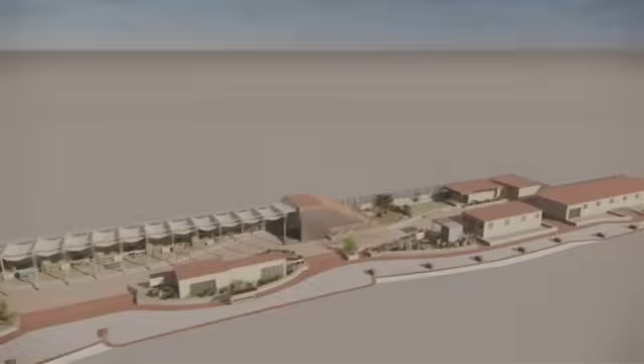My major design project was called Life in a Metro. It was about reclaiming public spaces for use by community, and the public space that was identified was a transit hub, particularly the Mandi House metro station.

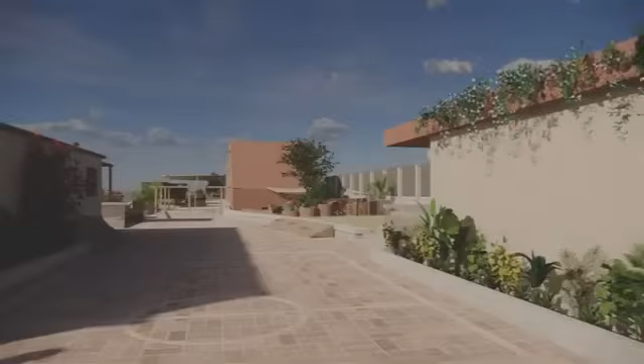I am Rashika Lungani, a final year interior architecture and design student at IIAD. In this project, I divided the station into two parts: an underground and an overground metro station.

What led me to arrive at Mandi House is an interesting story. I was transiting one day and I saw this massive span of underutilized space in the middle of a very rich locality. It was located near the National School of Drama, the Lalit Kala Akademi, and the Triveni Kala Sangam, places rich in art and culture, which was not represented in this public space. So I identified its potential and I wanted to change that.

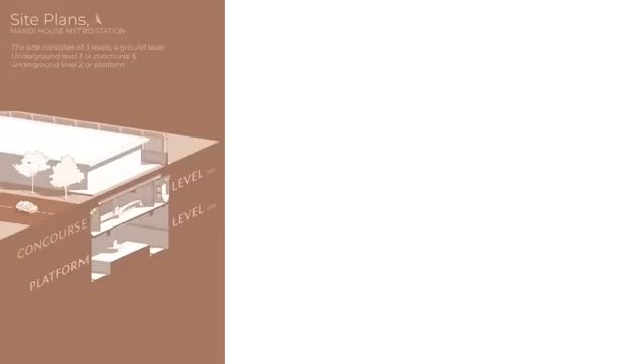Identifying the potential of Mandi House as a site, I needed to understand the site itself. Let me paint you a picture: the site is divided into three levels, a ground level where people enter, an underground level which is mainly the concourse where people move across to different lines, and finally the platform level where people catch their metros.

Given the importance of functionality over design, I knew I could not do anything on the platform level, leaving me with the other two levels. Even underground, the function of transit was more important than design intervention. That's why I arrived at a small underutilized area next to gate 3 of Mandi House metro station, where no people moved across and the space was left barren after the token booth was closed down after its discontinuation.

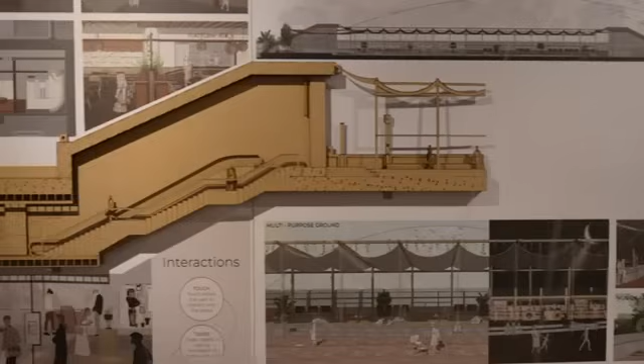The ground level itself had a lot of space and I wanted to use the entirety of it. When I was going through the site, certain problems were brought to my mind.

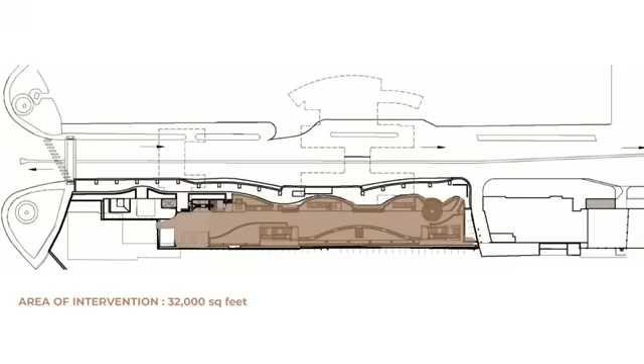On the underground level, I noticed there were no spaces for people to sit. It was just a dull transit space with no character, something I thought could be rectified by good design. On the ground level, the situation was a lot worse: 32,000 square feet of area being used for nothing, just a paved space at the side of the road, and that was it.

So with this, I decided to move forward with my project. This analysis made me understand that these two areas I was working on could not have the same design brief, because they had different problems and catered to different people.

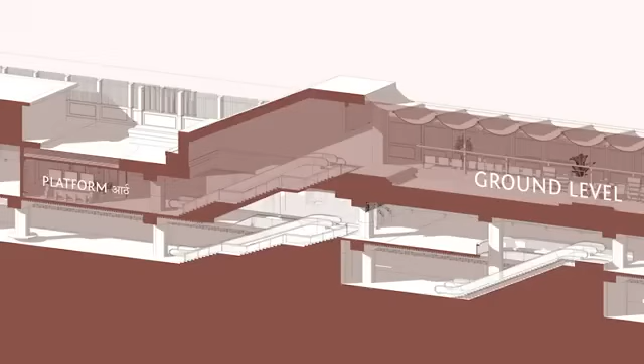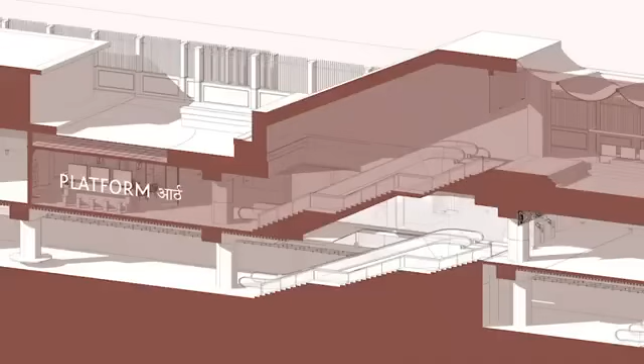At this point, my project bifurcated into two areas: the underground level, which developed into Platform Art, a cafe plus exhibition space for budding artists and metro users, and the ground level, which became Metro Maidan, an open public space focusing on physical, mental and educational opportunity for all the people around.

Identifying what I wanted to do, I needed to research more about how to achieve this outcome. I quickly realized the kind of space I was trying to create did not actually exist anywhere. As a result, my best resort was to go to metro stations and public spaces separately and see where I could find a cohesive spot for the two to coexist.

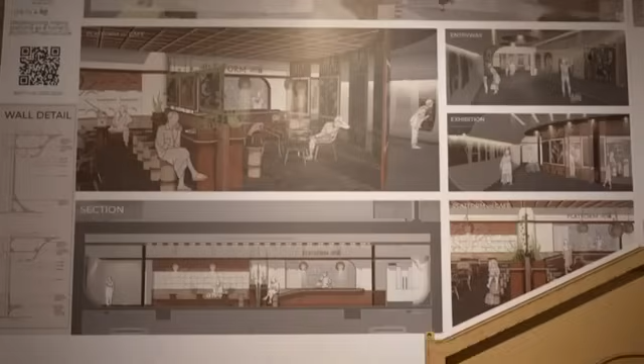Acquiring the plans for the Mandi House metro station was also a challenge on its own. Plans for public spaces are usually not shared openly with the public, so I knew it had to be a battle. I contacted every architect whose email ID was public on the DMRC website, and mailed them consistently, to the point where I got my plans with a reply saying please stop mailing our team. That was interesting, but they were really nice enough to help me out and assist me through the process. With this plan in hand, I could finally move to the concept stage of my design.

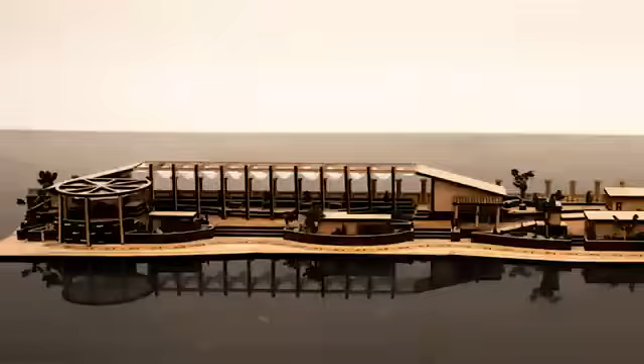The concept development of this project was a journey in itself. Now, with these two areas in my hand, I started with the underground level first.

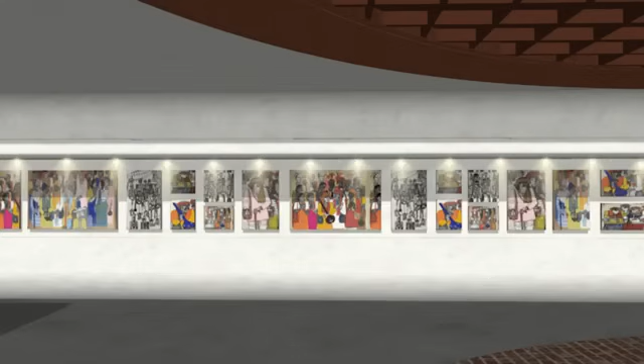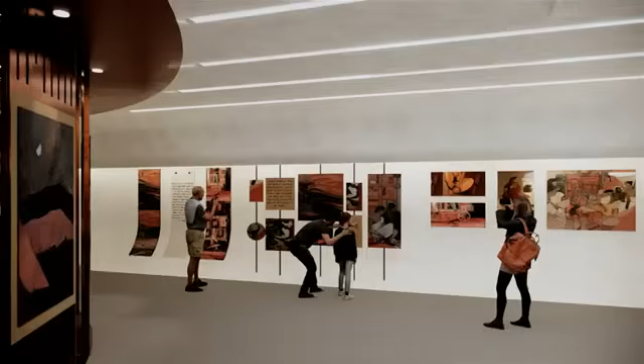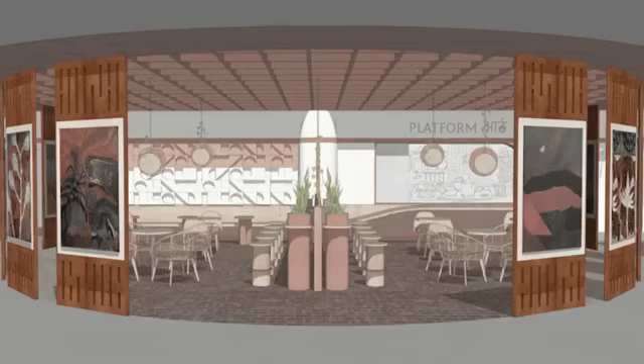I knew I wanted to create an exhibition space for artists because there is no free exhibition space in Mandi House. However, what type of exhibition it should be was a subject of debate between me and my faculty, particularly my head of department, Mr. Snehanshu Mukherjee. I wanted to create a metro museum, and he straight up told me that's the most ridiculous thing he'd ever heard. We realized the general public doesn't have incentive to go to places where art is displayed, especially when rushing home. Hence, we came up with the concept of inculcating a cafe within this exhibition to attract the general public through food.

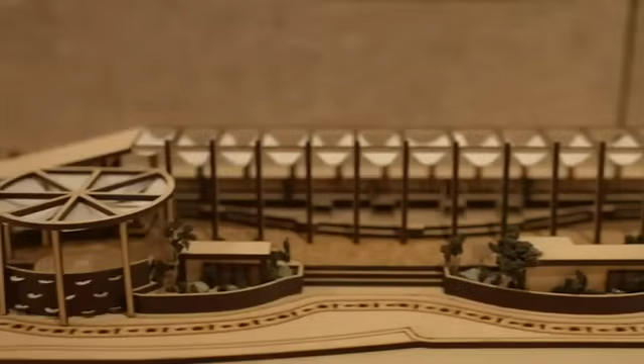For the ground level, the concept came surprisingly easier. It was a different journey than the concourse, probably because the space had so much untapped potential.

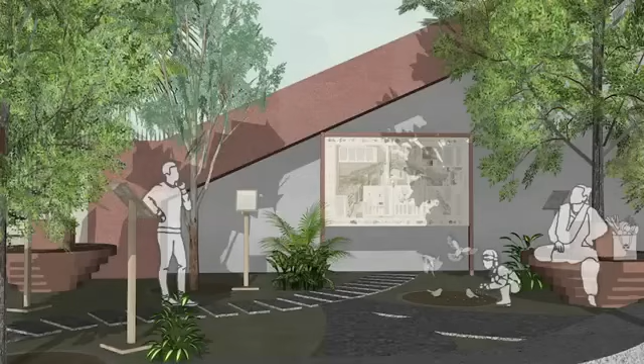I immediately knew there was a need for space for physical activity because I saw multiple people playing badminton and skating on the site. I knew there was a need for mental relaxation because workers around used to sit in the scorching sun to have their lunch. And I knew there needed to be a space for community interaction so the community, colleges, artists, and theatre enthusiasts could come together to share ideas. The concept of Metro Maidan came very naturally from there.

The proposed zoning for the Metro Maidan is mainly divided into three zones. The first zone is mainly art and theatre for use by college and theatre students. The second zone is the community interaction zone, revolving around places for people to come together and interact. The third zone is the physical activity and sport zone, mainly for college students and kids to come, play, interact, and enjoy. So to help you understand my proposed space planning, let me take you through my design.

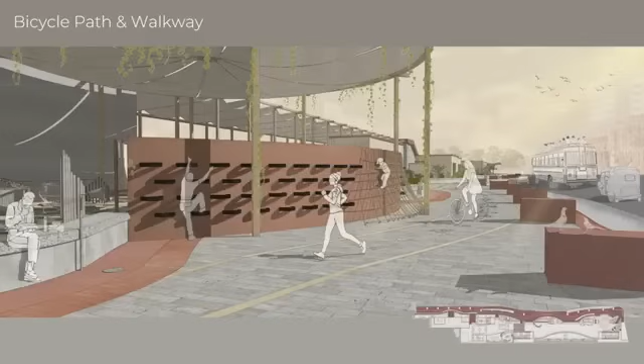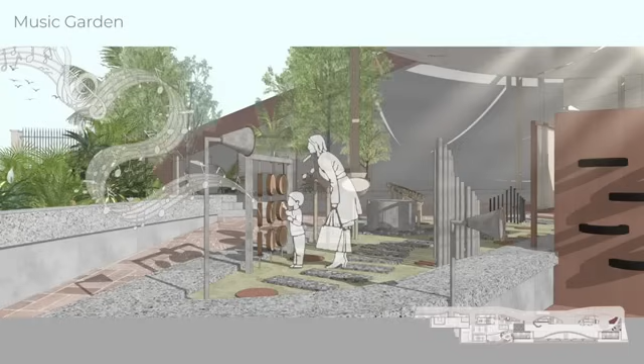At the road level, we have a bicycle way and a walkway for people to walk during the evenings and engage in physical activity. Ahead, there is a Zen garden in the shade of a tree for people to enjoy quiet evenings together. This is disrupted by a musical garden with instruments that create sound to attract the general public. These instruments also aid in creating background music for theatrical performances by students of the National School of Drama in the amphitheatre created right next to it.

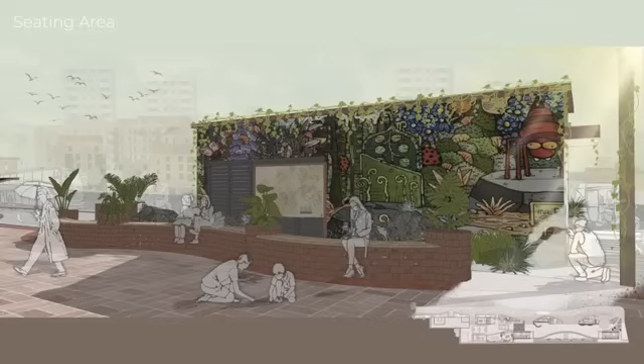As you go ahead to the community space, there are plenty of sitting areas for people to enjoy a peaceful evening in the shade of a tree, a building, or a mural created by artists. This overlooks a multi-purpose space used as a picnic and sitting spot during the day, but transforms into a robust market at night. What makes this space unique is the Park Se Bazaar benches, which can be reconfigured to create stalls at night, aiding the creation of a city market.

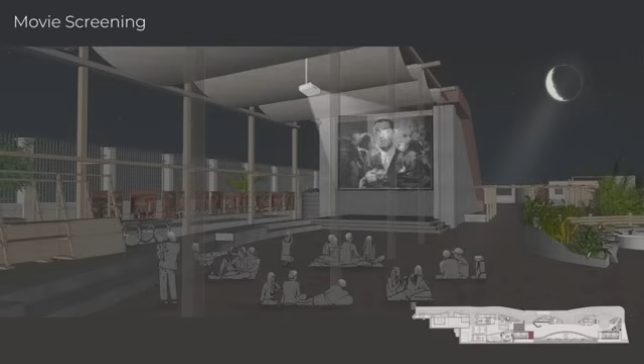Further into the night, the shutters of the closed metro station transform into an area for sport and theatre enthusiasts to come together and watch movies during public screenings organized there.

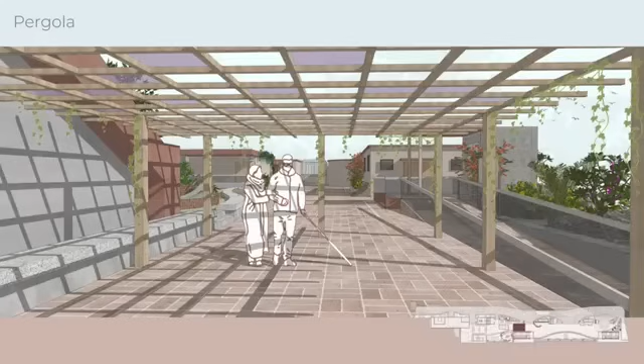As you go towards the physical activity space, a zone located away from the entry and exit gate receiving limited to no traffic, the transition is marked by a pergola with stained glass creating a beautiful interaction with the sun. Further ahead, a brick play area is created for kids, providing a range of sensory interactions and a comforting closed space without enclosing the area ahead.

Further ahead, paved yoga mats, skating ramps, and painted miniature badminton and football courts create an open public space for sport enthusiasts, college students, and the community to come together and engage in a healthier lifestyle.

As you come inside the metro station towards the underground level, near gate 3 of Mandi House metro station, you will see a bunch of token booths left barren. After the metro token was discontinued, this area was left without any intervention. Right now, gate 3 of Mandi House metro station has been closed to the public because there isn't enough foot traffic. As a result, this area away from the transit zone provided a lot of potential.

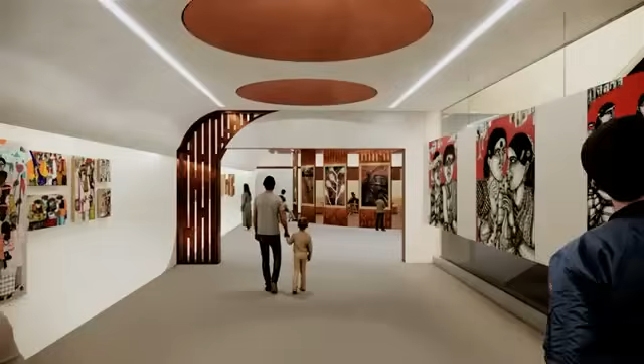To help you understand my proposed design better, let me paint you a picture. Imagine you're at the Mandi House metro station and you tap your card to exit. Right in front of you, an archway would frame the view of the cafe ahead. The space has also been adorned with craft, drawing from the heritage of Delhi and the program brief of supporting local artists.

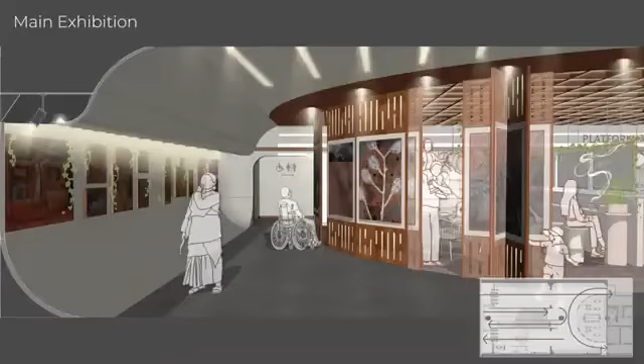This includes a khadi fabric panel made by the khadi spinners and a terracotta dome ceiling that would be commissioned to the potters of Kumhar Gram. As you go ahead, the presence of plenty of circulation space as per the DMRC standards also becomes very apparent.

The most striking feature of this design is the curved walls, which not only serve as a lighting element but also keep viewers at an adequate viewing distance from the wall, at the same time giving them a fun character.

The cafe space itself is located inside pivoting and sliding panels that allow artists to display their work as per their own accord and reconfigure the space, making the space dynamic and interactive.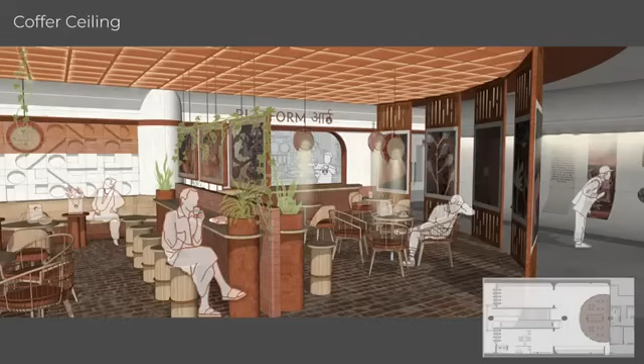The cafe space itself has a bunch of high and low seatings to give plenty of options to the viewers, a coffer ceiling to allow for plenty of diffuse light also required as per the DMRC standards. The hanging pendant lights in the cafe space are to be commissioned to the kite makers from Lal Kuan as per the proposed design.

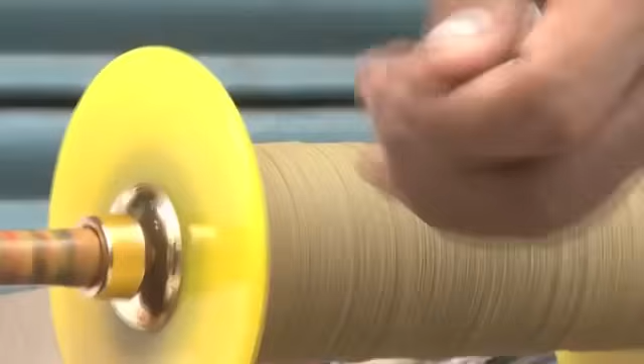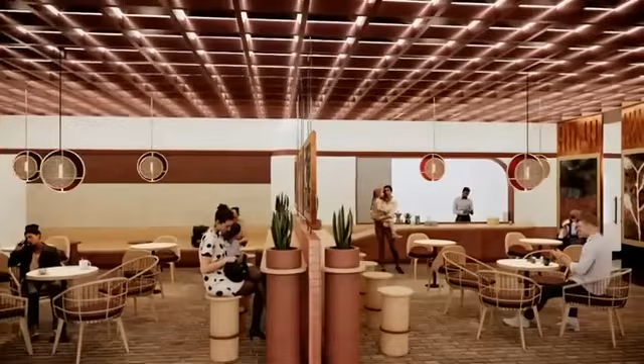For the platform art, I took a completely different route. Here, I wanted to create a space that would stand apart from the cold metro environment. For this, I went with a lot of warm materials like brick, wood and corten steel, along with a lot of reds that would help my space stand apart from the greys of the metro station while also creating a warm and inviting space for the metro users.

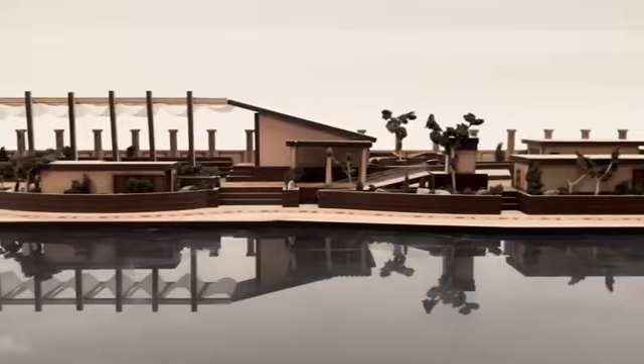So model making as a task was something which was extremely daunting to me. I don't have a lot of patience to sit down and make tiny models. As a result, I tried to force my faculty to not let me make models. I went to them multiple times saying that, please, I will do anything, but don't make me make a model.

And I was initially proposing creating vague and abstract models to convey my ideas. But they were really adamant that a detailed model is what I needed to put the nail in the coffin for this design. When I started making the model, I knew that it needed to be monochromatic.

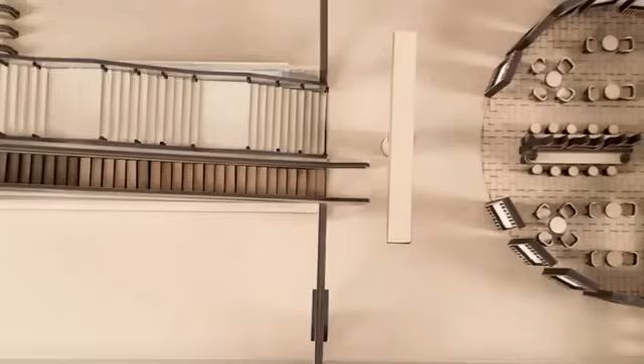So I started experimenting with different techniques, and that led me to arrive at MDF laser cutting. With this technique, I was able to efficiently make the layout of my model and start putting it together.

The models for the ground level and the concourse still had some difference to it. In the ground level, I had a lot of foliage around and a lot of details to populate the model. But on the concourse, in the end, I felt like the model was missing a final touch.

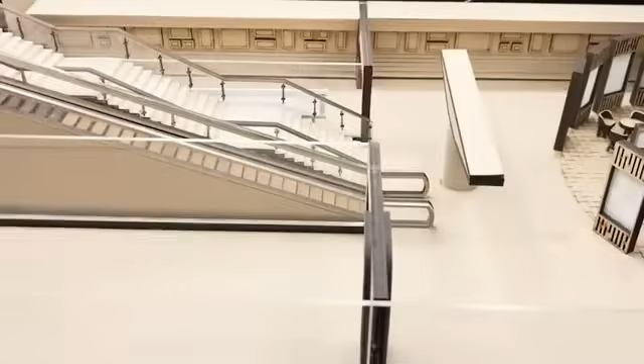It was recommended by my father that the concourse model have lights in it to create the illusion of an indoor space. So given the large scale of my ground level, the model for it was made at a 1:250 scale. On the other hand, the concourse level model was made at a 1:50 scale.

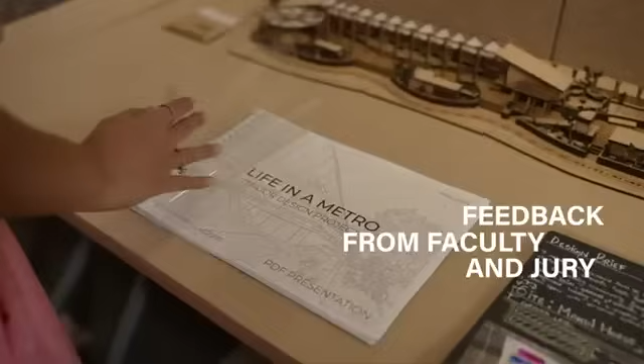In the earlier discussions with my faculty, we all were extremely apprehensive about this project. It's a project that has not been done before. There are not a lot of case studies, and working at a public space like a metro station comes with a lot of guidelines and government restrictions.

Naturally, we went through a lot of back and forth. There were a lot of arguments. Fortunately, the environment we have fosters these kind of arguments and discussions and back and forth. So we were able to align at a common model for this project.

When I was in discussion with my faculty and head of department, Mr. Snehanshu Mukherjee, initially I remember him being very apprehensive about my choice of materiality for the underground level and platform art. We were really not sure whether the contrasting materiality would create the impact we wanted it to or just create a visual disturbance for the people.

So we went through a lot of back and forth and iterations. I remember arguing with him saying that I do not want granite in my space. On the other hand, he felt like that would be the ideal way forward.

However, these discussions ended up being very fruitful because we were able to align at a common ground. The need for his granite and the need for my wood merged into an application of a brick floor in this space, showing how design discussions are very important to arrive at a holistic and acceptable outcome.

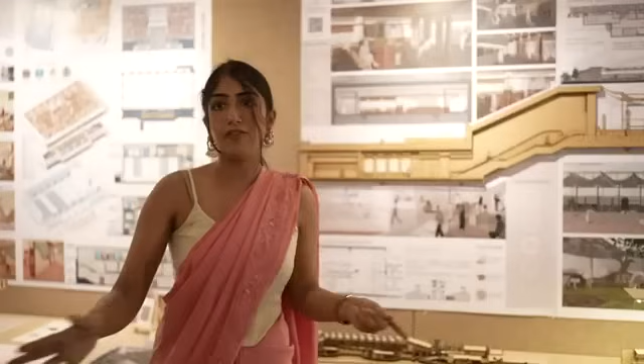Over the course of 6 months, we had multiple external jurors coming in to review our work and give us feedback. I particularly remember this one jury where I was showing him my design and he said, all well and good, but do they meet the DMRC fire standards?

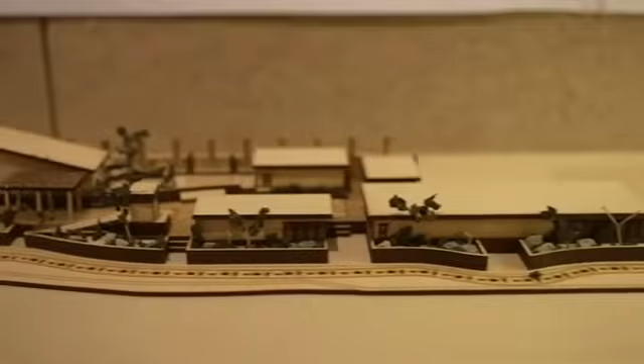And I remember my entire world just came crashing down because that was something I didn't consider in the first place, which highlights how critical it is to have an outside opinion or a fresh eye on your work. An interesting part of my project was the ground level, the Metro Maidan, which took place at an architectural scale. This really helped me because my faculty are also architects by profession.

So their input on something apart from interiors also helped me get a broader perspective of how I can go about my project. If I were to quote one particular feedback, it would be by my course leader, Mrs. Rashim Mahajan. I remember I was creating this shamiana for my outdoor space and I went all crazy on the design, only for her to come back and mention, 'Rashika, how will the water go down this? What is the drainage system you will put in it?' And I was like, what do you mean, ma'am? I created a beautiful design, and you're asking me how the water goes down this. So it helped me understand a lot about architecture, landscaping, and the importance of functionality in outdoor spaces.

For the platform art, initially I had proposed the use of PVC panels and a lot of wood and fabric in my space to create that illusion of fluidity and an artist-oriented area. However, I very quickly realized that fabric is not very efficient at fire control. So naturally, this caused me to relook at my material and arrive at materials like brick and corten steel, which are also approved by the DMRC fire standards. That was a learning about how to align design with the functionality of a space.

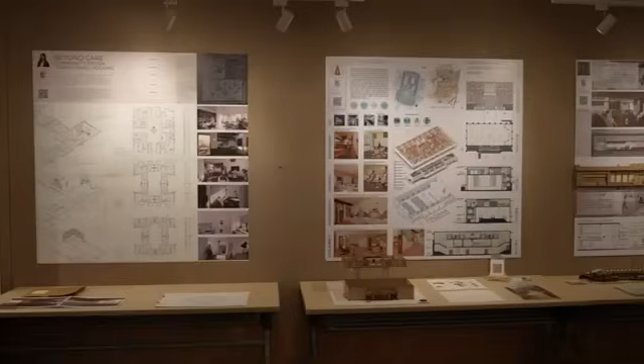I think as a budding designer, our initial overview to any project is very narrow. For us to be open to more opinions and other options, we really have to be pushed to our boundaries, and that is what faculty feedback and external juries do for us. It forces us to look at things and answer questions we probably didn't want to answer in the first place. So these were really important to identify the milestones and growth in my design, without which I probably would have just accepted my first iteration and moved on.

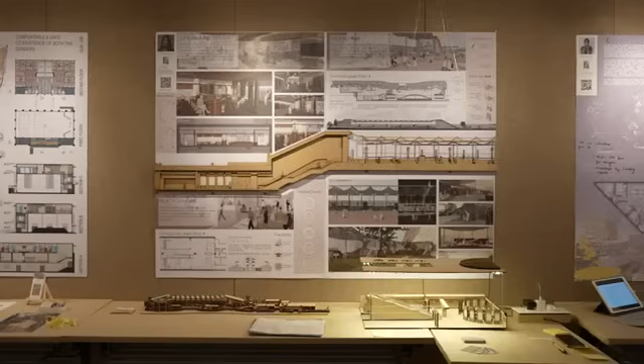I remember I finished my 12th grade in 2020, which was the high point of COVID-19. At that time, I was just looking for a university whose people I could connect to, and IID proved to be that place for me. I came here to meet the faculty and interact with them, and their opinions, their way of communicating, really left an impact on me. It was that community that pushed me to go forward with IID as my final choice for a university.

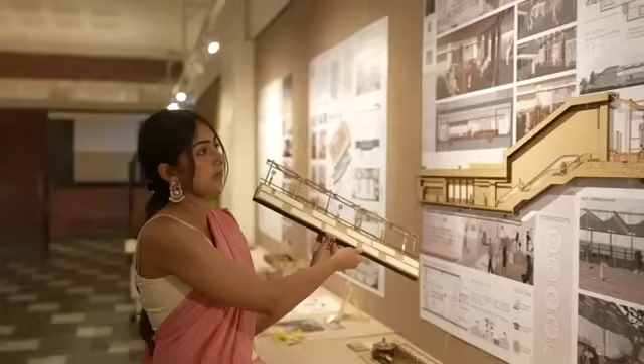I knew I wanted to be an interior designer ever since I knew that was a profession. I couldn't pinpoint the exact moment I realized it, but I always knew I wanted to do it. But I had a very naive way of looking at what the profession meant. Four years ago, when I applied for this course, I thought interior design was all about choosing wall colors and painting pretty things and putting nice things on the wall. However, now I have a more mature way of looking at it, and I realize how technical the profession is.

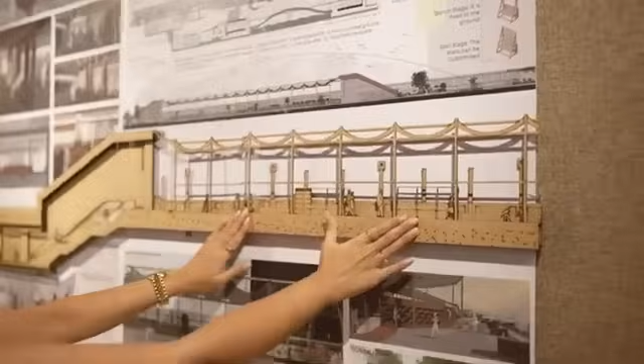And that's not necessarily something to be afraid of. Spaces are complicated to make, yet they look so simple, and that is something I have learned through these four years. Building spaces requires a lot of effort, but at the end of it, the outcome should look effortless. It's about how much effort and detail you put into creating something simple, and creating a space which creates an impact on the people around it.

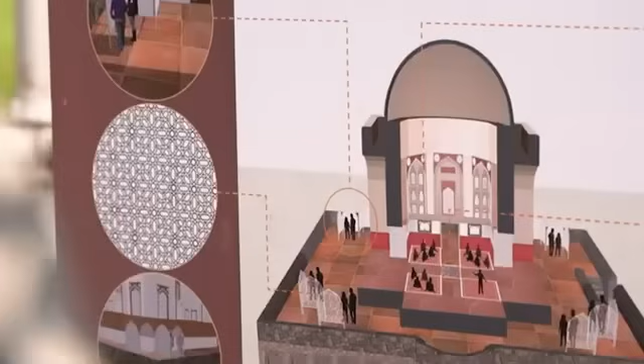I have learned a lot about technical details and design over the four years. However, my professional and personal development still paramount all of them. The critical learning I had during this project was the social responsibility a designer carries. It's very easy to think of a designer as the person who comes at the end of the project to make it look aesthetically pleasing. However, I realized how important a designer is for the general public to be able to use a space, even if it means just giving a shaded space for somebody to eat their lunch in the evening. Being a designer carries a great responsibility towards the community to create spaces for them and to be used by them.